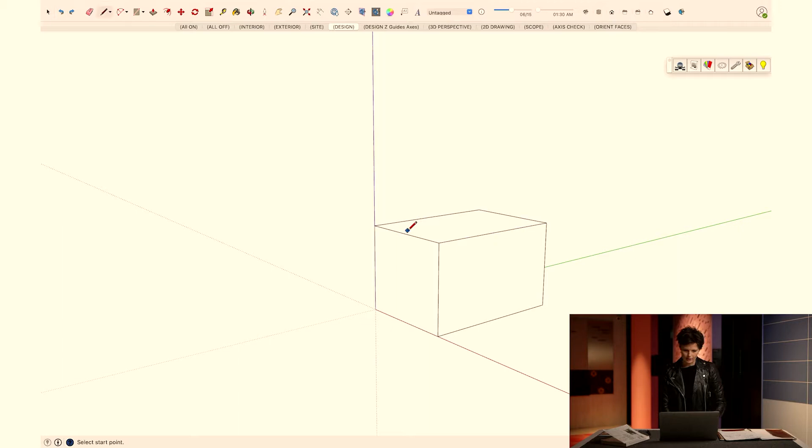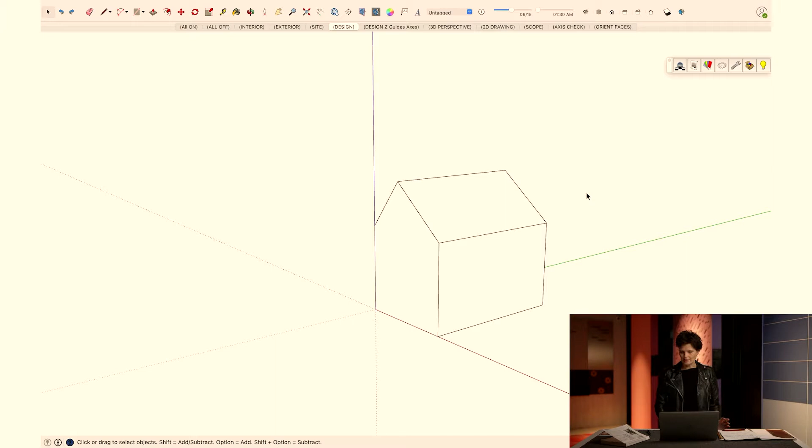It's easy to do it just like this, so you know you're drawing in the right way with the use or help of the axis. But when I want to show my design to my clients and want a clear picture, I don't want to show the axis because it's disturbing. So that's when I choose another scene with other settings, and you see the axes are gone, and you just have a nice clear view of the design.

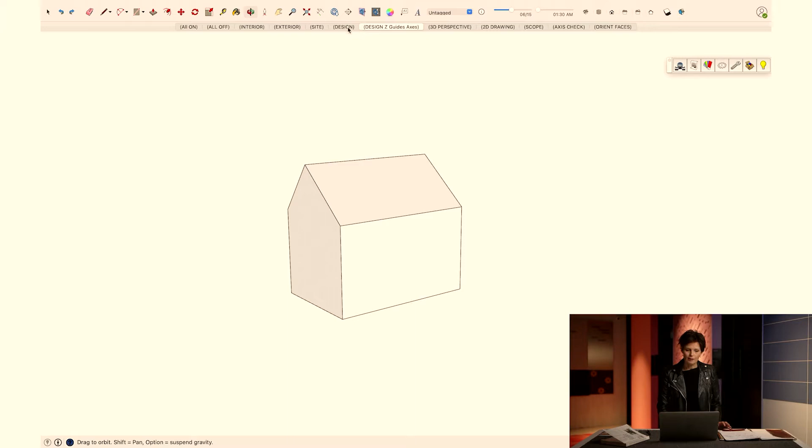But sometimes you make a little mistake and don't know where. For example, you made a cube, you think you made a cube, but somehow the line is a little bit off. It looks like straight lines, but it isn't. So when I use this scene setting, axis check, immediately you'll see the line that is not in line with the axis, the edge is colored black. This is a really nice tool, and you can simply fix it and go on with your design.

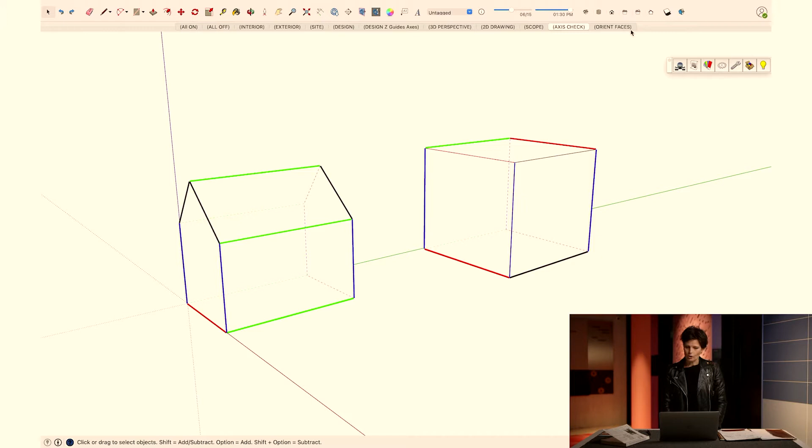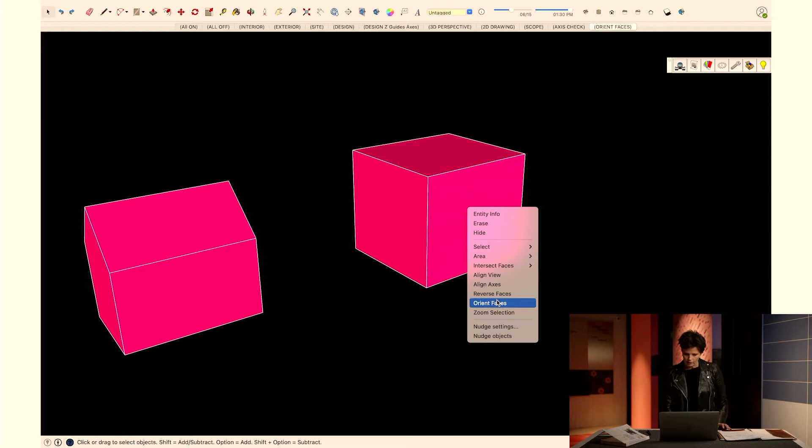Also, an important feature is orient faces. You see in this scene all the faces are colored bright pink. But when you reverse a face, I'll reverse it right now, and you'll see that the face has a different color, because this is the back side of the face instead of the front side, which is important also when you want to render.

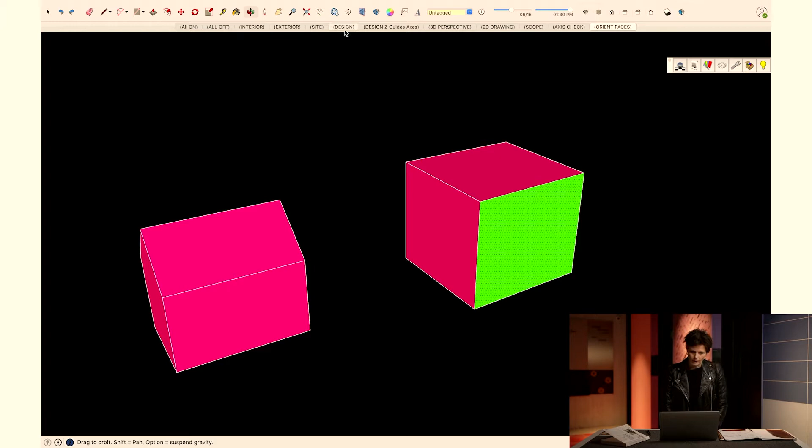So these are some tips and tricks that I use. But then, when I build my model, I'm going to save it and import it into the layout drawing program of SketchUp. I'm going to show you now.

Here I have an example of a project, a big attic floor just near Amsterdam, and it needed a total renovation. It was one open space, but the family that lived there wanted a big playground for their kids. So I designed 2 bedrooms for the children and a bathroom for the children, and downstairs was an extension for another bathroom for the parents.

But let's start, here I'll show you how I work. I use a template that I just showed you in layout, and as you see, I can give a quick sense of the layout with all the most important measures. Then I'll show you that you can also use nice colors and materials in SketchUp, and without rendering have a very nice result.

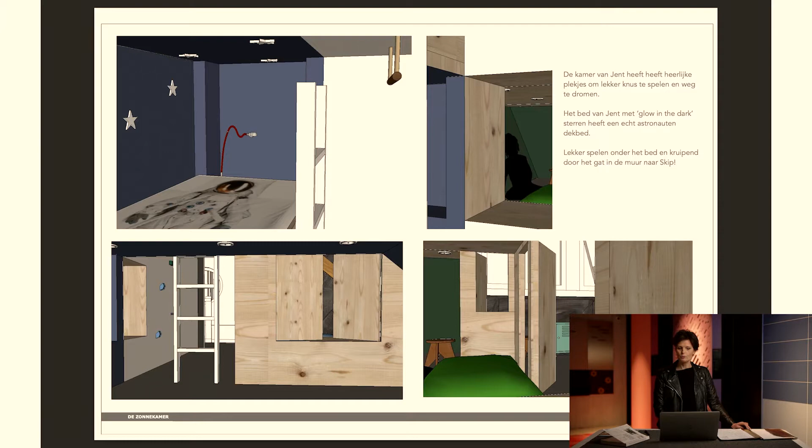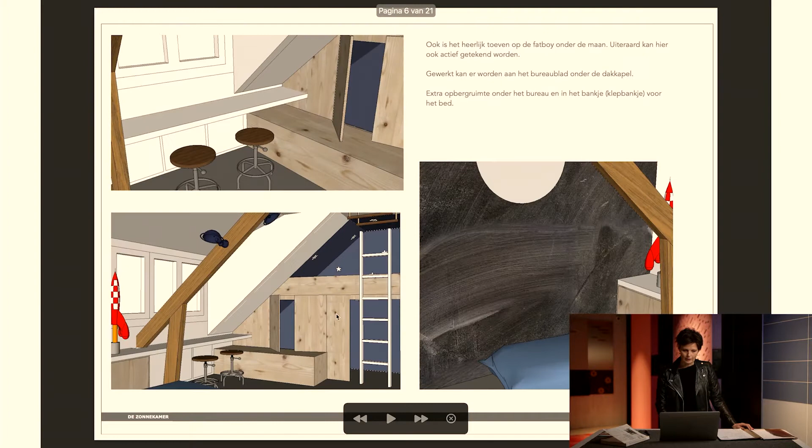As you see here, these are visualizations of the bedrooms of the children. They can just crawl through the cupboards. Here are the cupboards, it's just a separating part, they can crawl through here to each other. So these are all images with a lot of color and material, and it gives you a good sense of the atmosphere you want to reach.

So this, for example, is the room of the little one. You see, it really gives a good feel. I also want to show you the panorama view of the rooms of the boys. I made it for them because they could use the VR glasses, and they were very happy to just have a look around in the new room. I'll show it to you now.

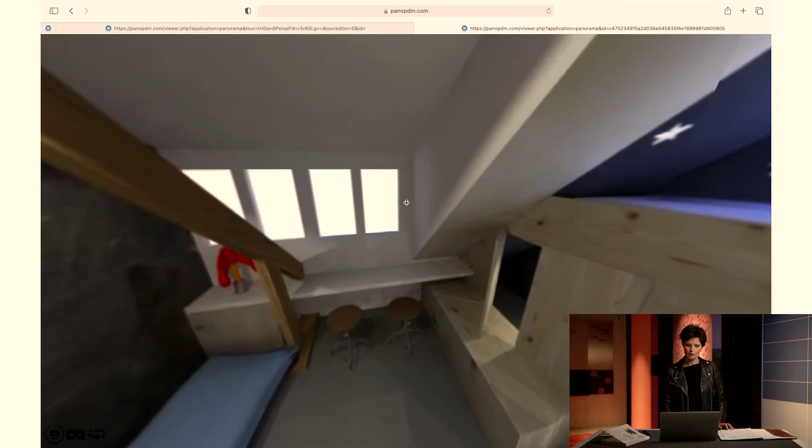So for this panorama view, I used Podium, and this, for example, is a 3D moving image of one of the rooms of the children. You can see you can also use lighting. I've drawn a climbing wall, and here is a hole to the other one, the other room of the other boy. So this is the other room.

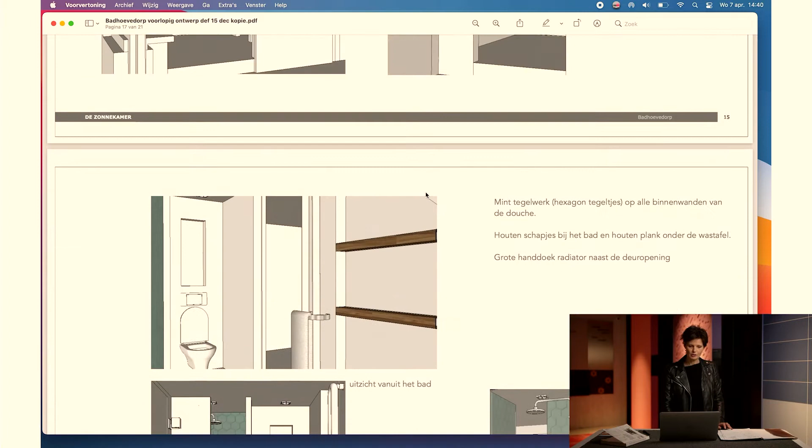So you can see it really gives a good idea of how this room will be when it's finished, with here the hole to the other one. So you see, when you use SketchUp and a presentation software for layout, you can really show all kinds of different images, mood boards, visuals, and also a movie.

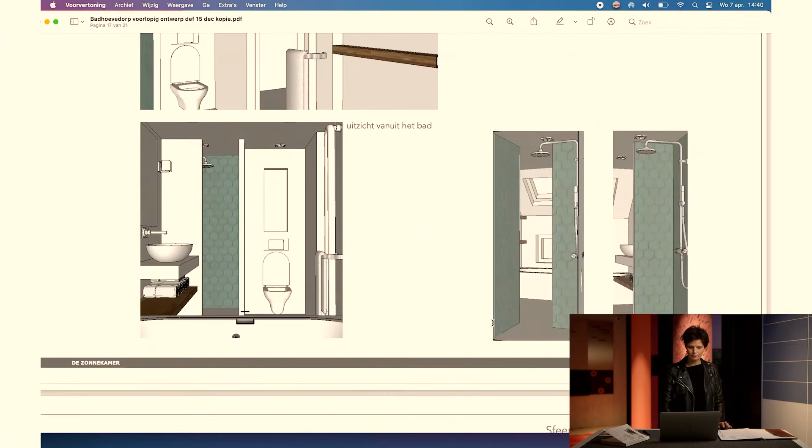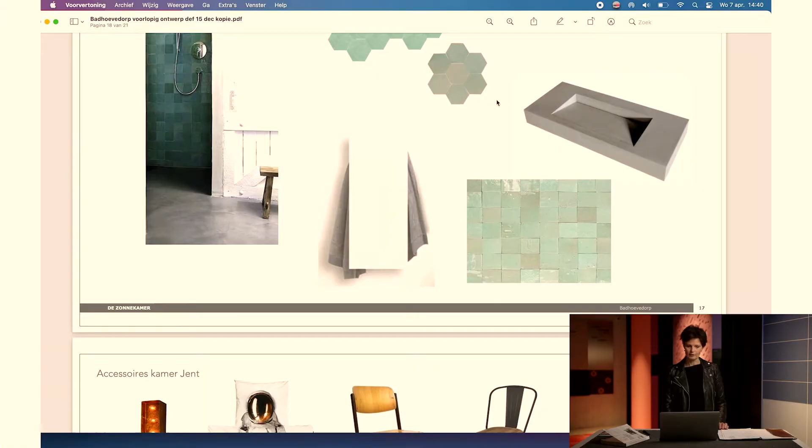So what I also do a lot is making mood boards and finding accessories and the right products for the rooms, wallpapers and so on, so that the clients can easily find and make the atmosphere that we have created. So the next project I want to show you is a concept design.

So the one I just showed you was already with a lot of colors and materials in it, and you're a bit further into the process. But of course, when you start drawing and designing, you first start with some concepts. And for this one, I will show you my layout documents.

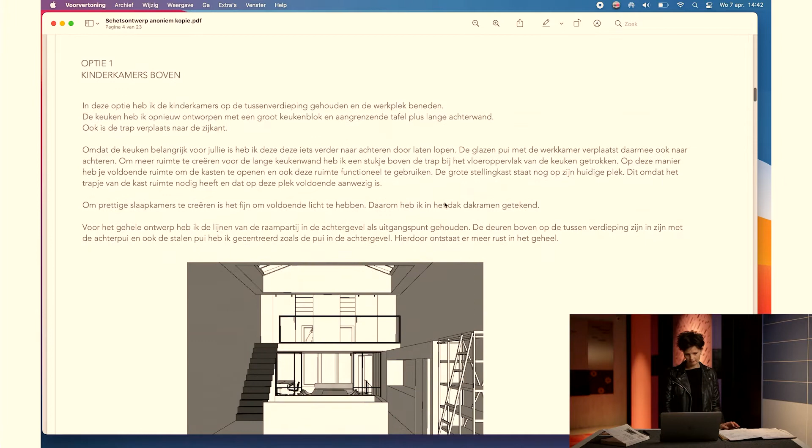So this is a canal house in Amsterdam, with a family with 2 children. In this canal house, they want a big kitchen, 2 bedrooms for the children, and a study. So I started with an open space, and as I go along here, these are the concepts.

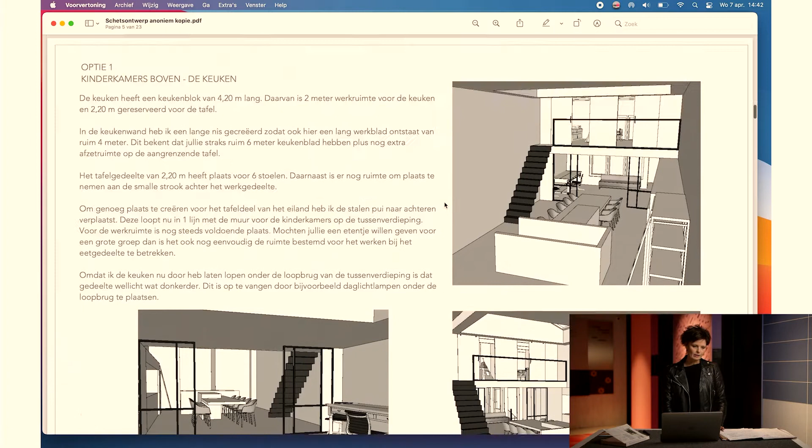This is option 1. It's all still in black and white, because it's just not as concrete yet. So of course, again, the layout with the most important measurements: a big kitchen, a study separated by the kitchen with steel and glass doors, a lot of cupboards, space, and above on the first floor is like a mezzanine with rooms for the children.

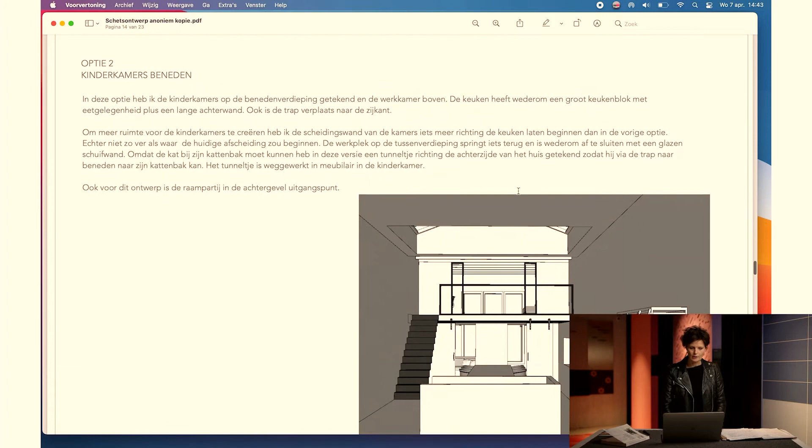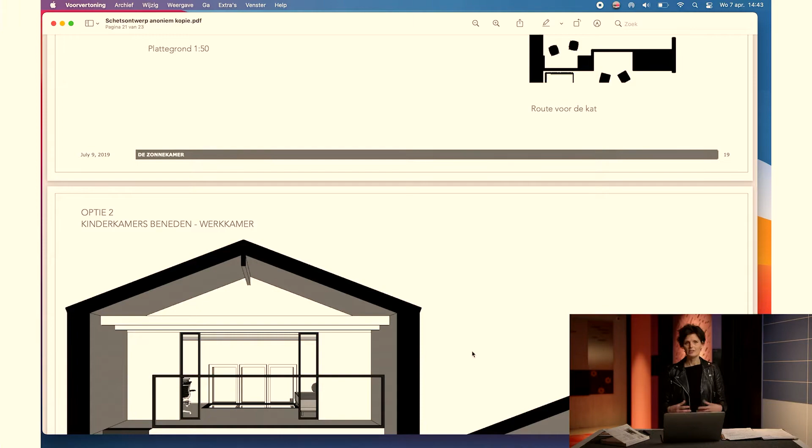The other option, we'll go to it now, is with the study upstairs, and downstairs are the children's rooms. So then I present this to the customer, and they can choose what we will do, and they choose one concept, and that's when I go and make this more detailed. So for example, these people chose a concept with the children's bedrooms downstairs and a study upstairs.

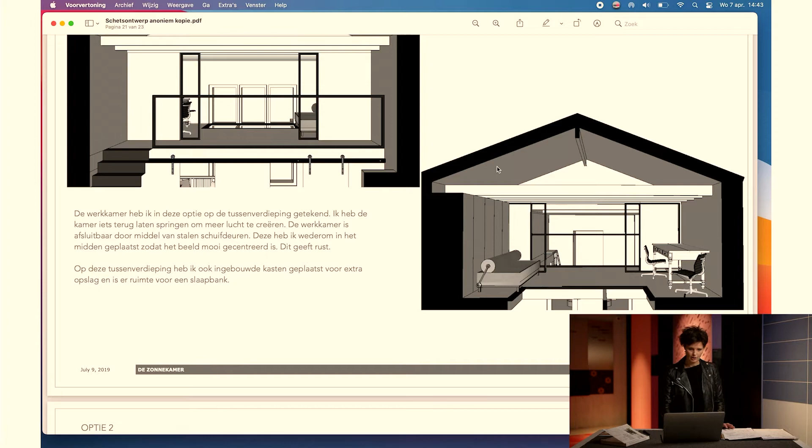So then I made new drawings, but also the contractor needs to know what I need to prepare for this build - for example, for the steel doors, the glass doors, but also where to put the air conditioning, electricity, and so on. So I want to show you that also these kinds of drawings you can easily make with LayOut.

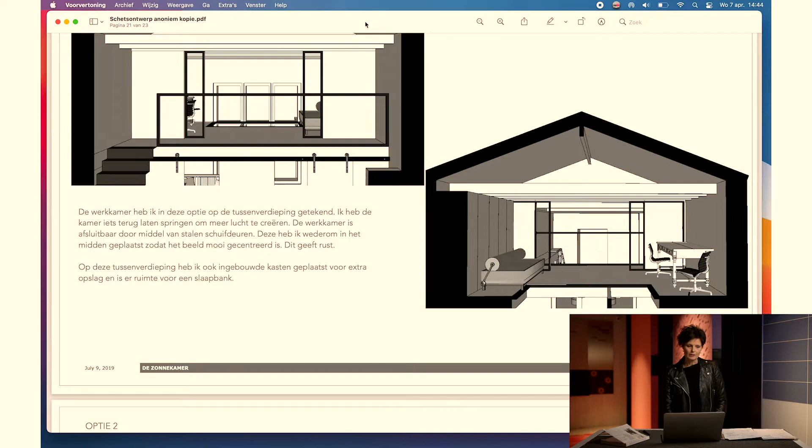And I will open this version of the drawings right now for you. So these are the drawings that I made for the contractor. And usually when you make drawings for the contractor, first they want to know what's the current situation, and then they want to know what's going to be new.

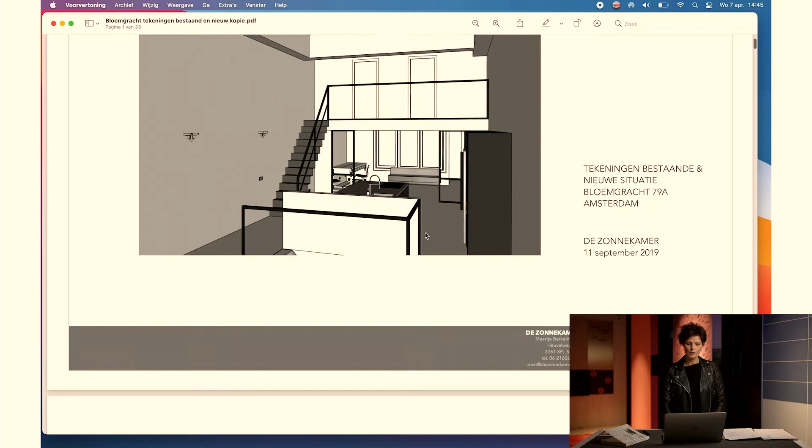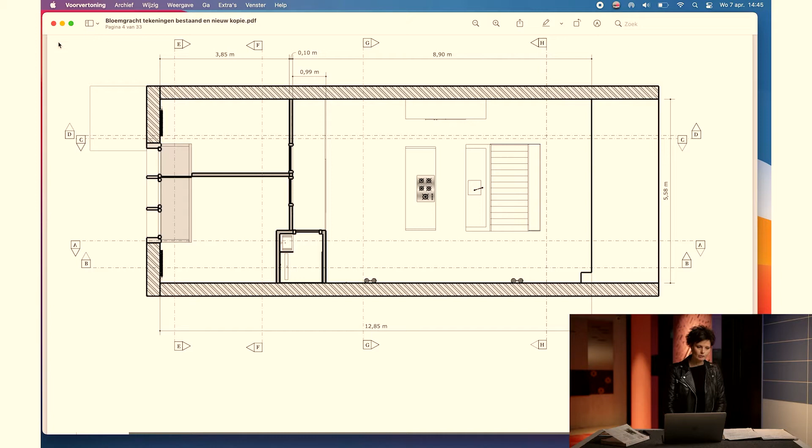So here I make the floor plan of the current situation, and you can see that it already has all the hatches in the drawing, and measurements, and also here all the cross sections that I made. So this is pretty detailed, and the contractor just gets a good image of the situation right now.

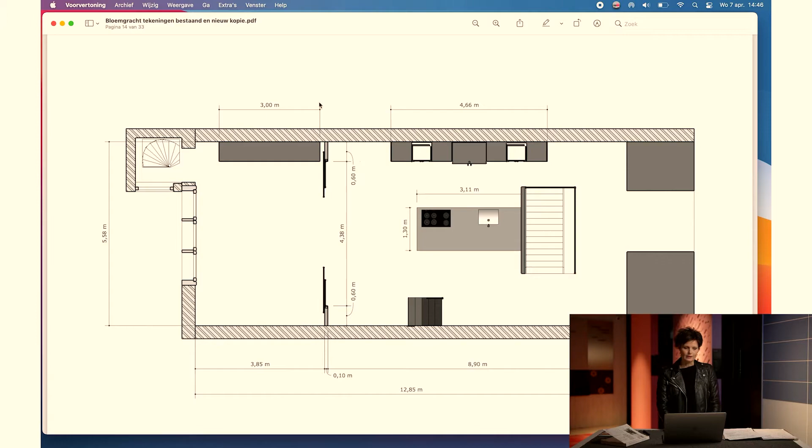Then, of course, I will show the drawings of the new situation. This is the new design, again all with hatches and cross sections.

Also the place where the lighting will be, all the lighting fixtures, where the beams are, and for example here where the light fixtures will be, but also the air conditioning, placed here above. So the contractor sees exactly what he needs to buy, how much he needs to buy of this, how much material he needs.

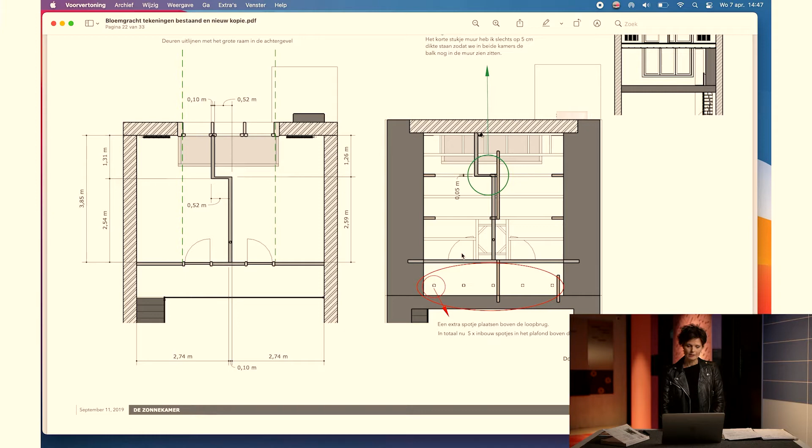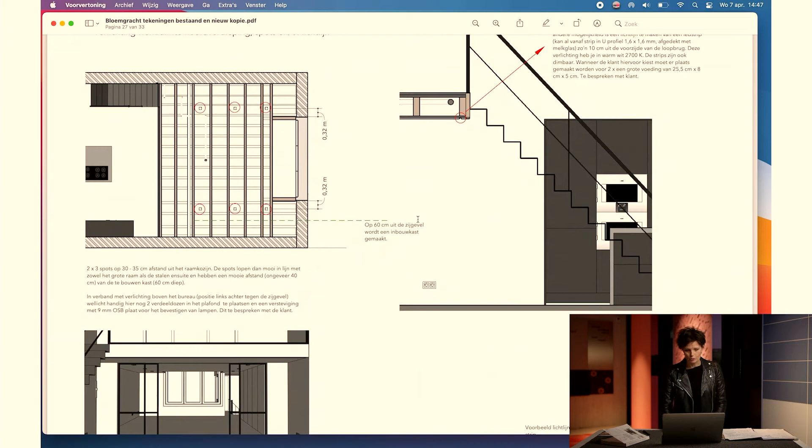So all the most important details and placements are visible with these drawings. Also here, for example, the water drain of the air conditioning, all the beams, where the light fixtures and spots will be, and so on, and the skylights too. So all these technical specs you can also visualize very well with the layout SketchUp software.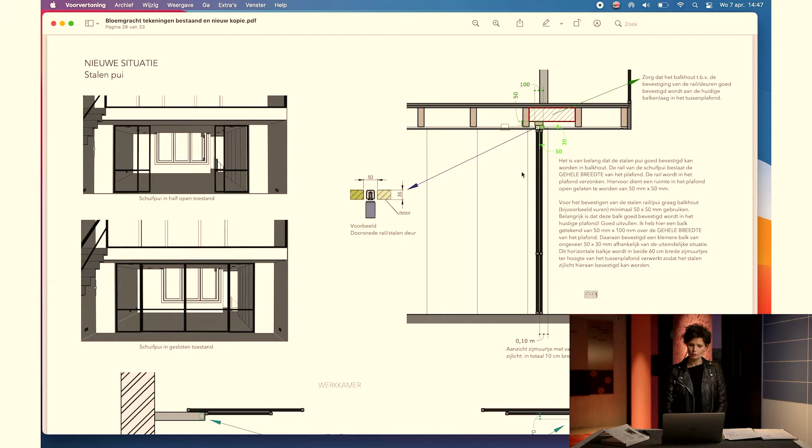For example, here, what do I need to prepare to install a steel sliding door, or to install a steel door with a rail where the door will run on. So it's really good software to use.

Another project I'm working on right now is people who are going to move. They bought a new house and they want a really big kitchen because they're real foodies. And they have this huge wine cabinet which needs to be in the kitchen.

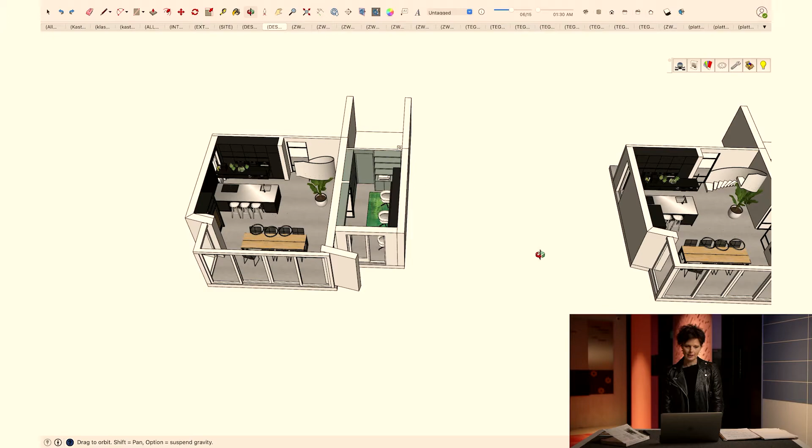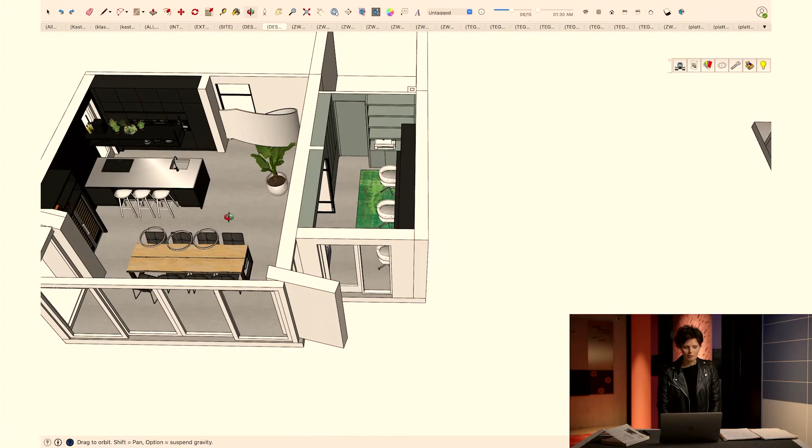And also they want this study next to the kitchen. When they asked me to design the kitchen, they told me they don't think the wine cabinet can be in the kitchen, let's place it in the study. But I'm not sure if they will be working very hard with this wine cabinet in the study. Anyway, I told them I think we can also just place this cabinet in the kitchen.

So I made a design, and I also made a little movie to show them how it will feel in the kitchen when the design is finished. I made it in Podium, so they will have a feel of how it will be in the new kitchen and study. So this is one design I did.

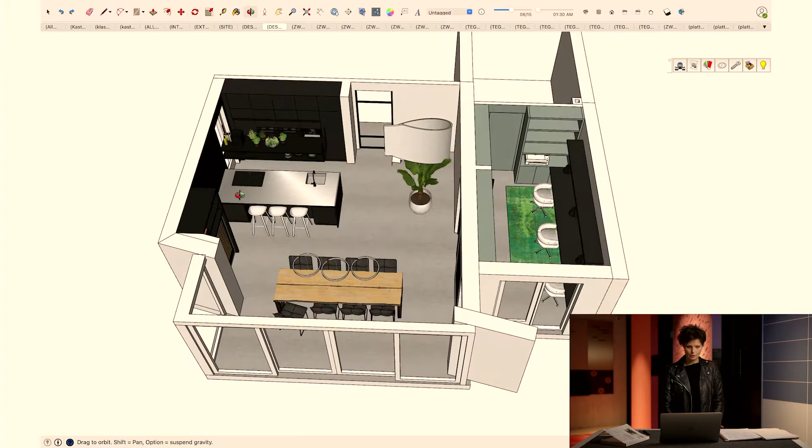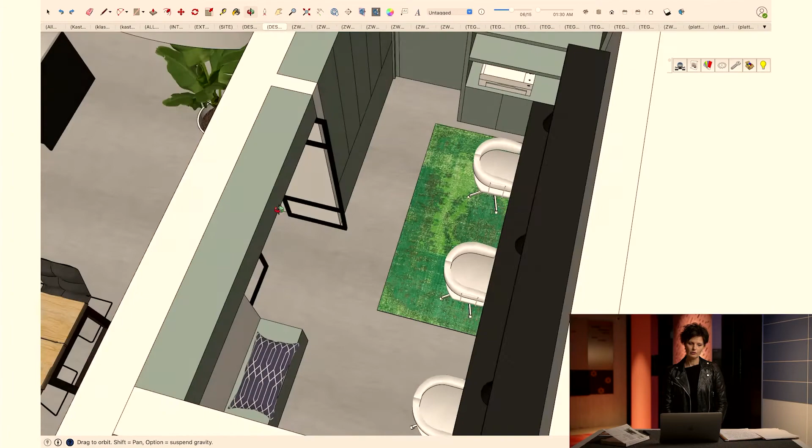All black accent wall and a study with all built-in cabinets and some steel doors. The other one I made is this one with tiles as an accent wall, green, and a different design for the study.

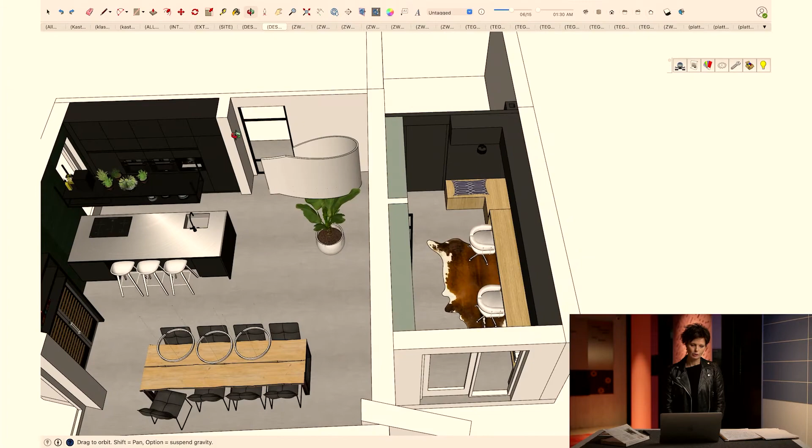So this is also what I do a lot. We will go around into the model, just turning it and orbiting, and then I can also show the client what is happening in the model, and sometimes make some changes while I'm at it and showing the design. So this is the panorama viewer from Podium, and here all the panoramas are collected, and you can just click on it and view them.

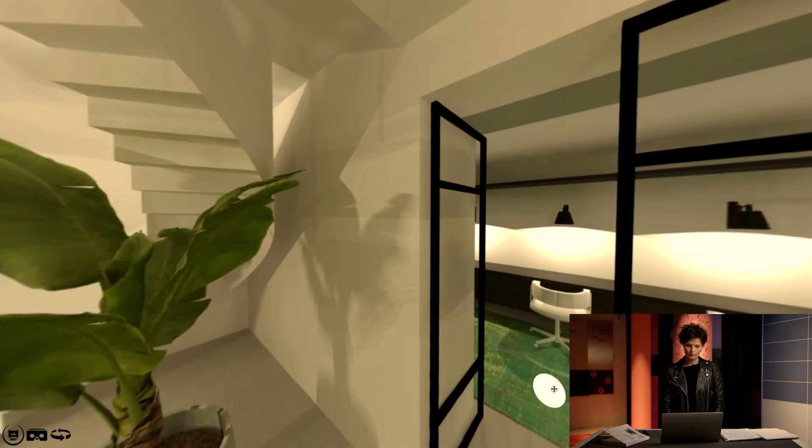So I made this little tour. You can just turn around. All the lighting is already in there. Then you can just click and go to another space. This is the study.

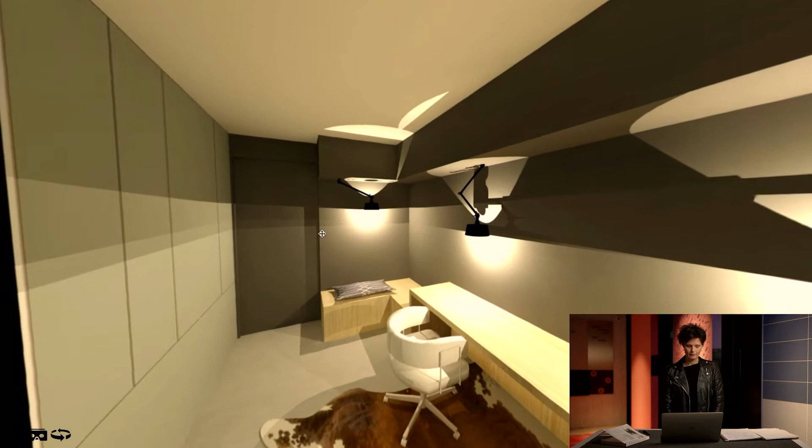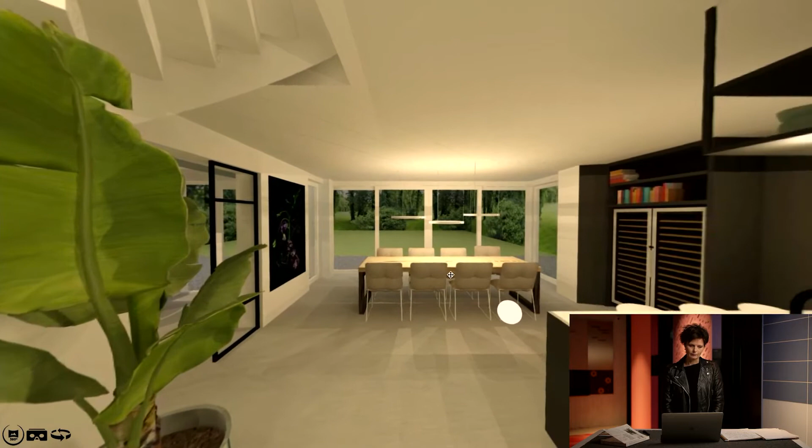So this is also very nice for the customers, and so they have a little tour of their new home. So all this is possible with Podium.

Another project I would like to show you is exterior as well as interior. This is a little farmhouse, and the owners wanted to connect it with a shed, which is over here. For this project I made an extension of the house like this.

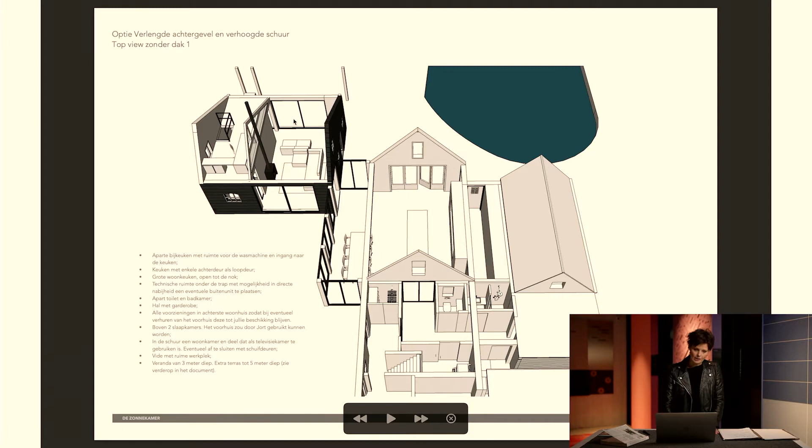So now it's possible to make a really big kitchen. Before, this was the living area and there was a small kitchen over here. But for the new design, it's a really big kitchen, with the connection with all the glass and steel windows to the shed. In this shed is now a living room and also a small study. Here you see that SketchUp is also easy to use for these kinds of drawings.

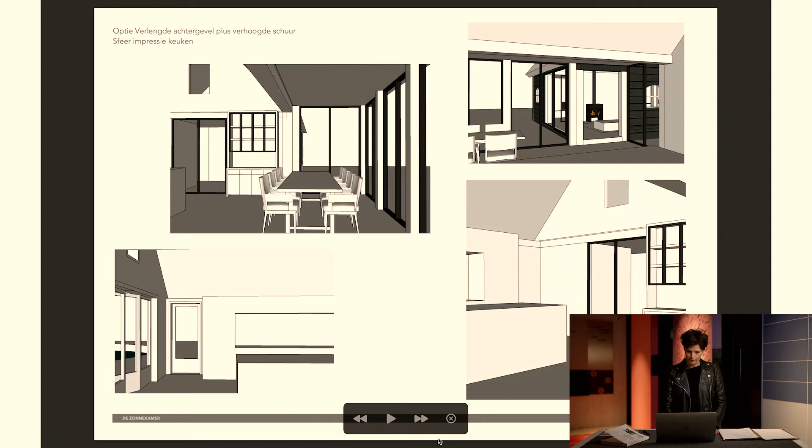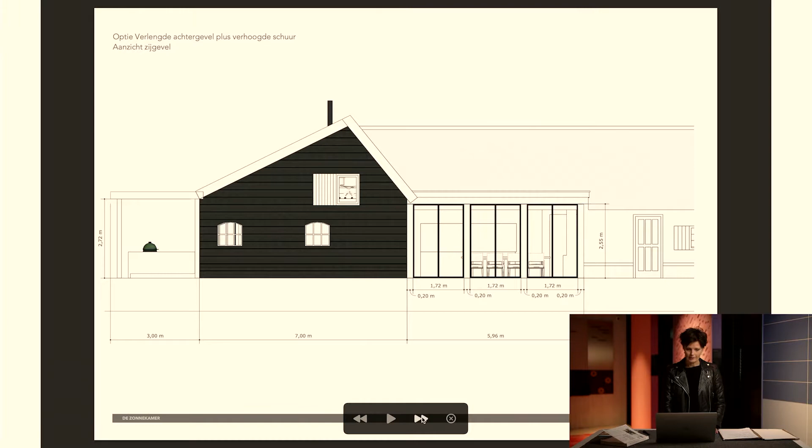Here are some views, like visuals that I put into my presentation. What is also nice is that when you are doing a project like this for interior and exterior, you want to show how these buildings are connected. Often it is also with a garden and all lines and designs of what happens just outside the building.

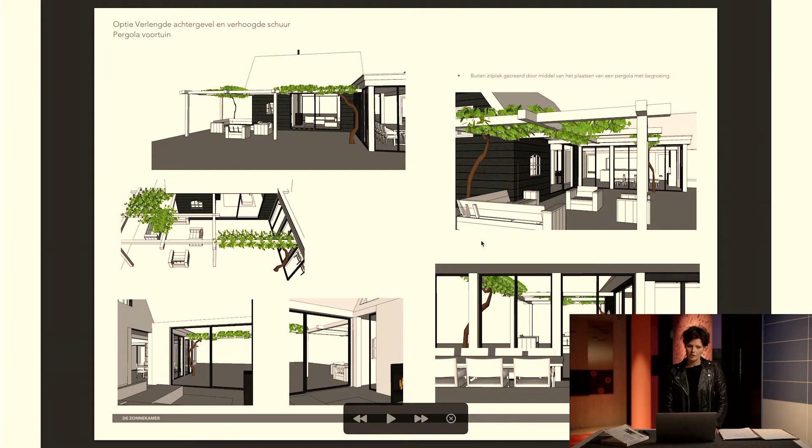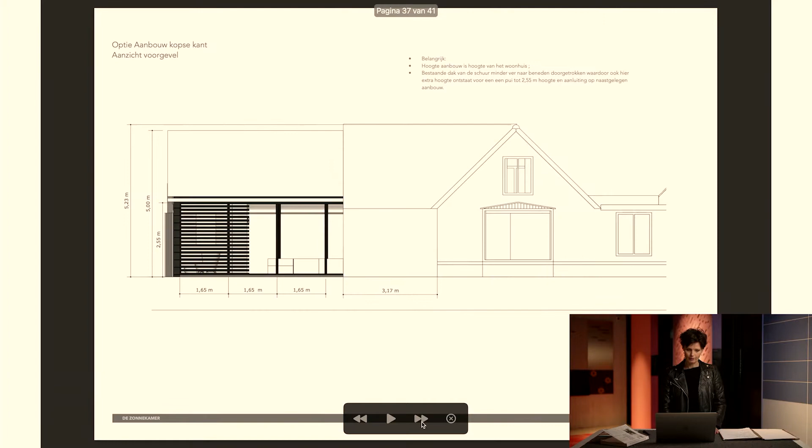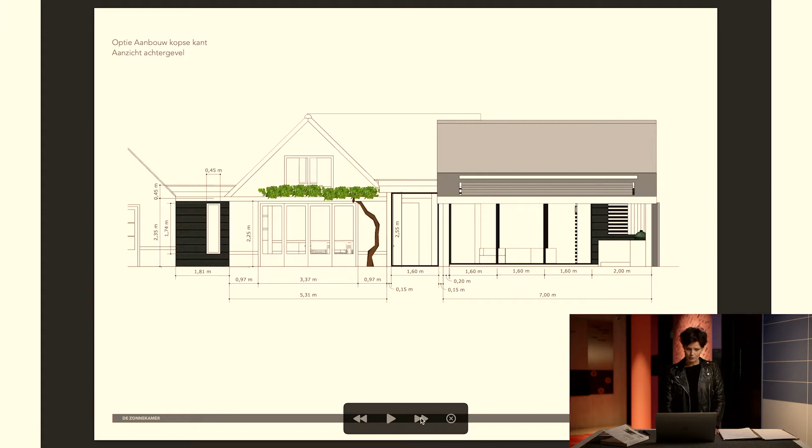Here, for example, a layout with all the most important measurements. So when the contractor sees this and they say we want to go with this option or the other option, then they can also see, oh, we have to order this, we have to order that, all these kinds of materials, so it's easier to make a price. So you see that you can also visualize a garden and connection of inside, outside materials. It's all possible with SketchUp.

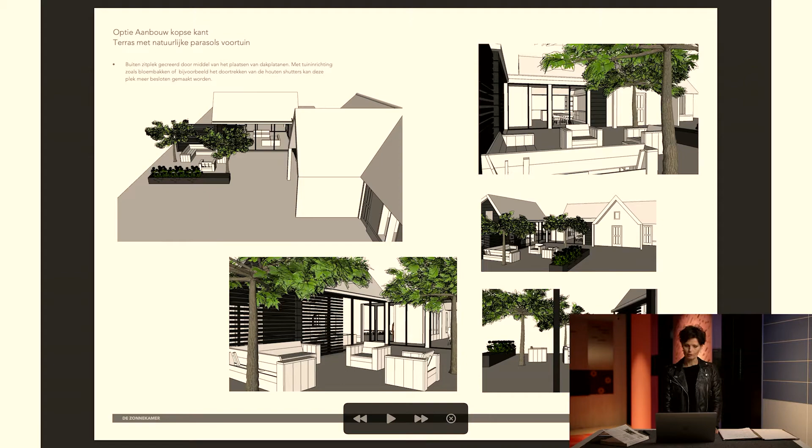Hi, my name is Maartje. Pretty impressed, you're a pretty productive lady. Well, lots of projects. The first thing that pops into my mind is how much time does it cost to do these projects?

Well, it takes a lot of time, of course, to make such a nice product in the end, with for example the bookwork that I always do. You're also printing it out? Yeah, I'm printing it out in a layout format, then you get a nice presentation document.

Yeah, okay. And you mentioned working with templates in your presentation. Can you tell a bit more about how do you arrange the lighting in these templates and how do you create a template? The way I created the template is with the help of Brightman, a book which I use to organize my model in an efficient way.

Question from the audience: what is the name of the book again? The writer is Michael Brightman, and I think it's called SketchUp Workflow. He's an American architect, and he has really put his mind to making this SketchUp model work in quite a lot of different useful ways, not just drawing, but also creating some kinds of tools within the SketchUp software. And templates, how do you create those?

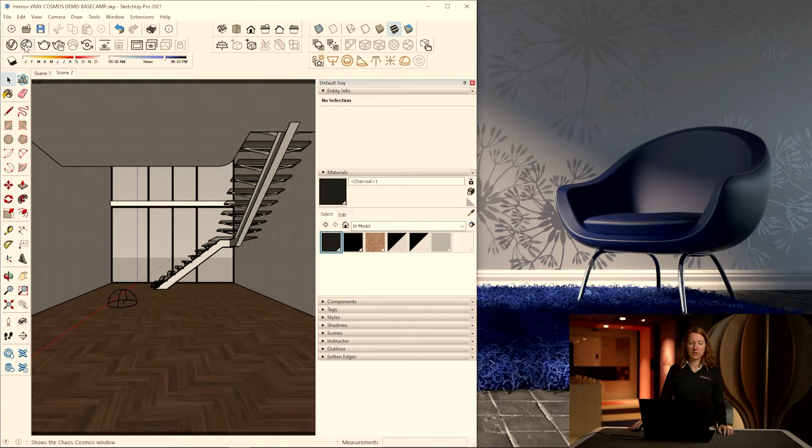Right off the bat, we can see all kinds of stuff we can download. We can download furniture, accessories, vegetation, lighting, vehicles, and people.

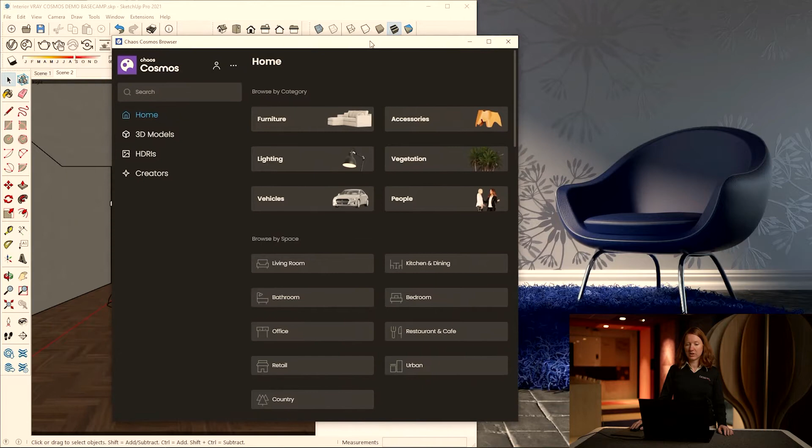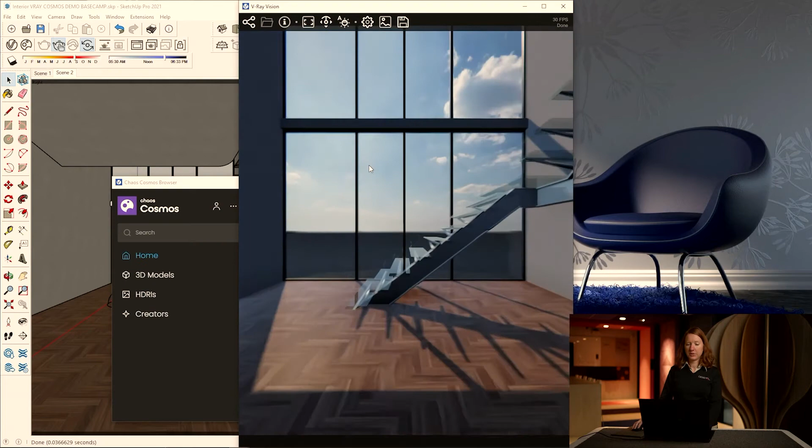In order to see what it's actually doing, I'm going to fire up V-Ray Vision as well. V-Ray Vision is specifically introduced for V-Ray for SketchUp, and it's a real-time rendering engine — actually a gaming engine. You can walk around in it using your gaming controls: pressing W to walk forward, S to walk backwards, A and D to the side, E and Q to go up and down. As soon as I click back into SketchUp, it's going to resynchronize my camera.

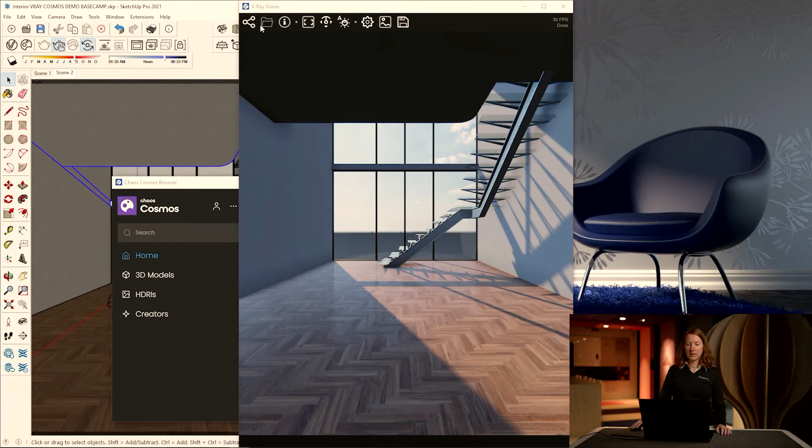Unless, of course, I don't want it synchronized, then I can choose to unlink my camera. Right, so we're going to download some assets, and we've got an empty room, and we're going to add some furniture.

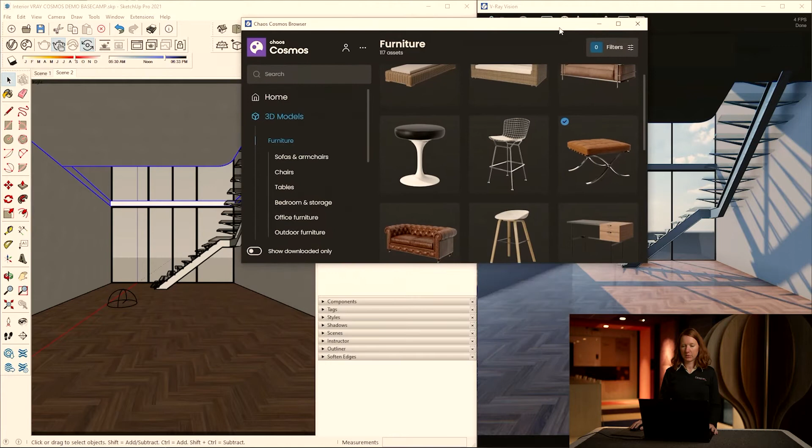It's going to be a living room, so I'm going to download a couch. You can see that in SketchUp it downloads a low detailed object, while at the same time in the render we have a high detailed object. Now let's pick the chair that comes with it.

I want a pretty rug, and I want a coffee table. Everyone gets to have some coffee or tea, you could drink tea from this mug as well. Let's put a magazine on the table as well.

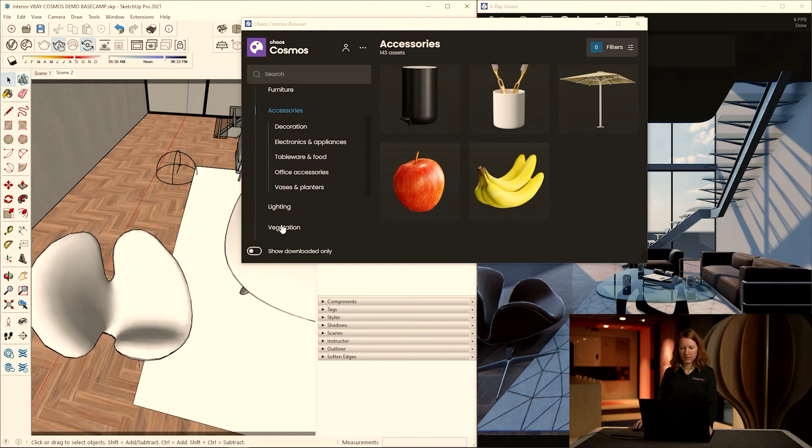That's fun. Let's put some plants as well. So we're going to go to vegetation and pick the subcategory indoor plants, and let's put this indoor plant right in the corner over there, and let's take this one as well.

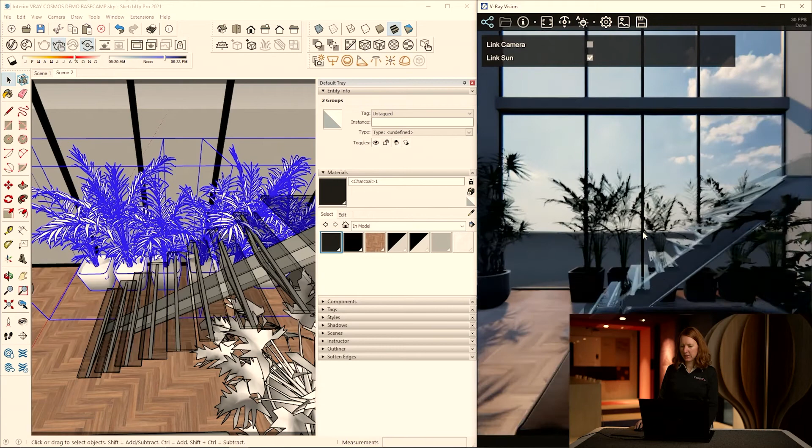In our render, it's maybe not very obvious, but these plants are pretty low quality still in our render. We can up the quality by checking on that we want to use high quality Cosmos assets. So we check that on, and in order to actually see the effect of that, we have to restart Vision.

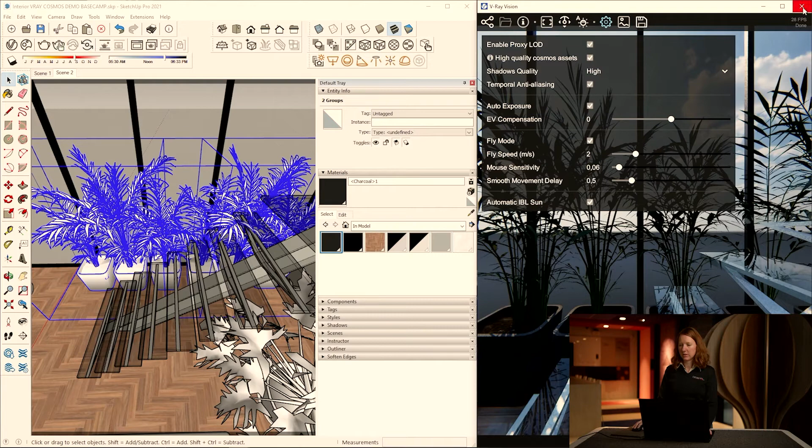So let me close that down for a second and restart. And now we've got the highly detailed version. You can see the leaves are much prettier now.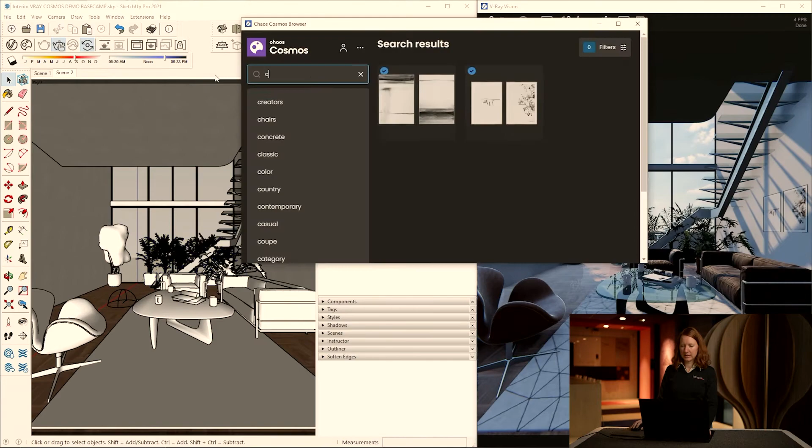So we have our little tropical rainforest. Let's add some more details, let's add some art on the wall.

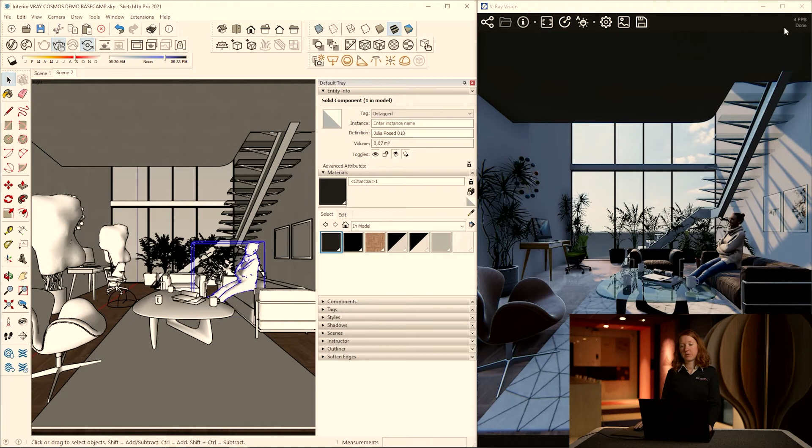Of course, I have used all this time my V-Ray Vision rendering preview, which is useful, but it's not very pretty. It doesn't offer me the high quality experience that we are used from V-Ray itself. So I'm gonna switch off V-Ray Vision, and I'm just gonna fire up an interactive render.

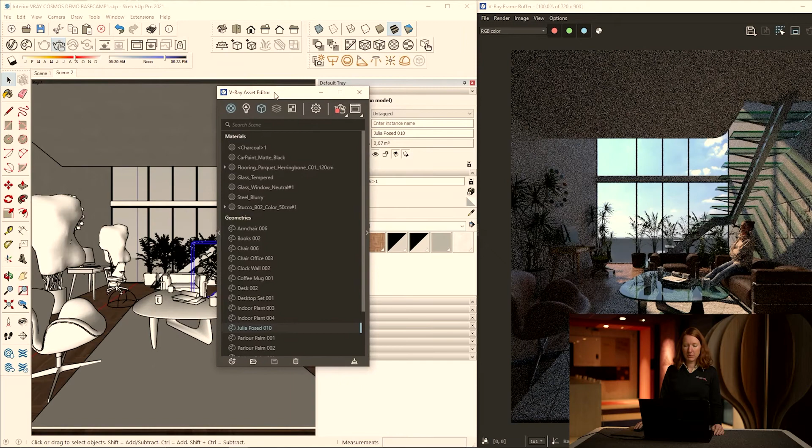Right now we have the middle area, which is quite nicely lit, but the left area is very dark. Maybe we should add some lamps as well. Lighting, wall lights.

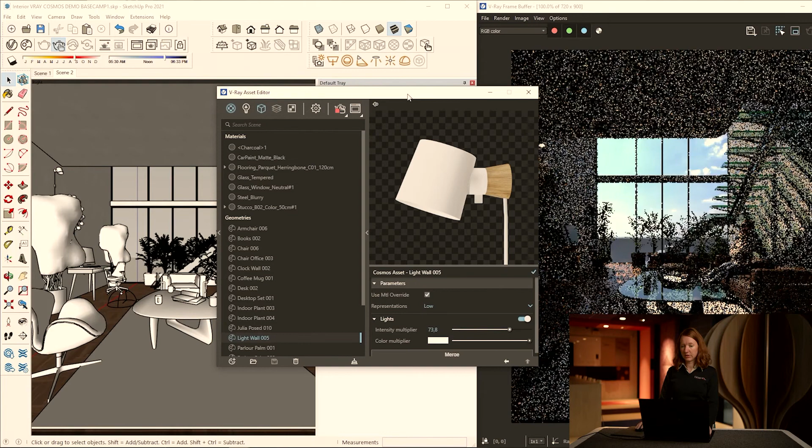And I want to make them brighter, so I'm going to up the intensity for this light source quite a bit. And if you reach the end of the slider, you can always just type if you want more.

And then of course I can change my camera settings. You can use the very simple exposure value. Now if you want to tweak it, use your arrow keys, because if you slide it with the mouse, you're going to overshoot your target.

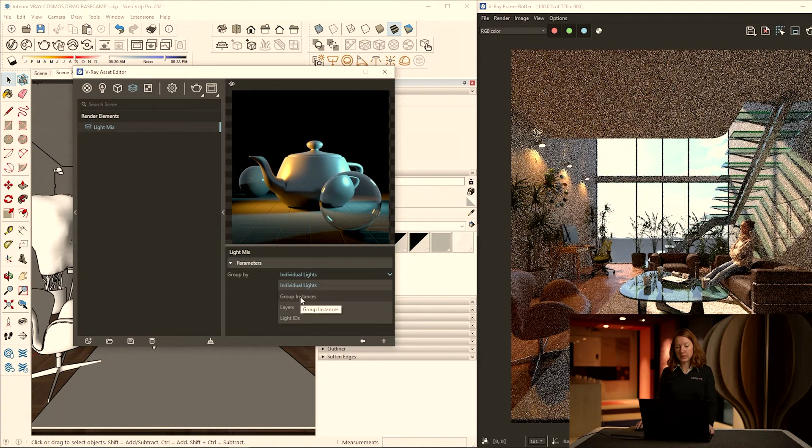I'm happy with that, and I'm going to stop my interactive render. And for final rendering, I really like to add a light mix render element, which allows you to tweak your lighting after your render is done.

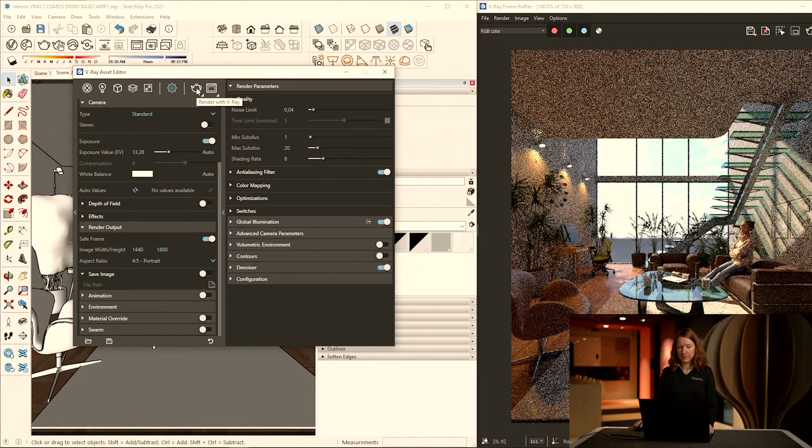And maybe the resolution could be a bit higher as well, let's put that to 1440 by 1800, and render out. And of course, that's gonna take a while, so let's fast forward that for you guys.

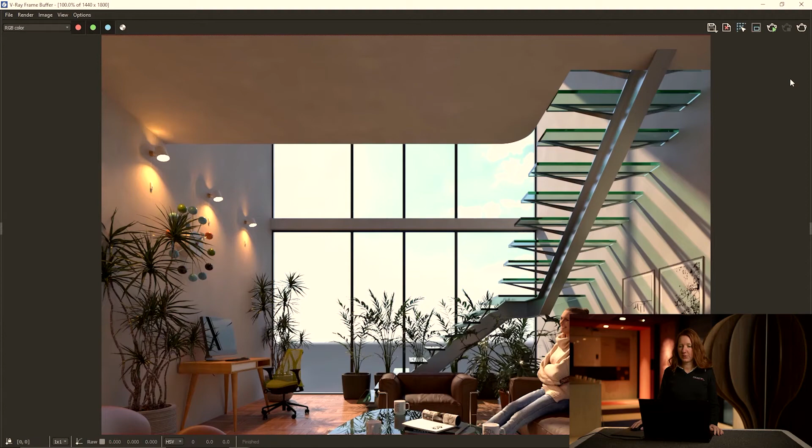Our render is ready, and you can see we've got a beauty. Now let me tell you just a few little more things that we can do with this render now that it is ready.

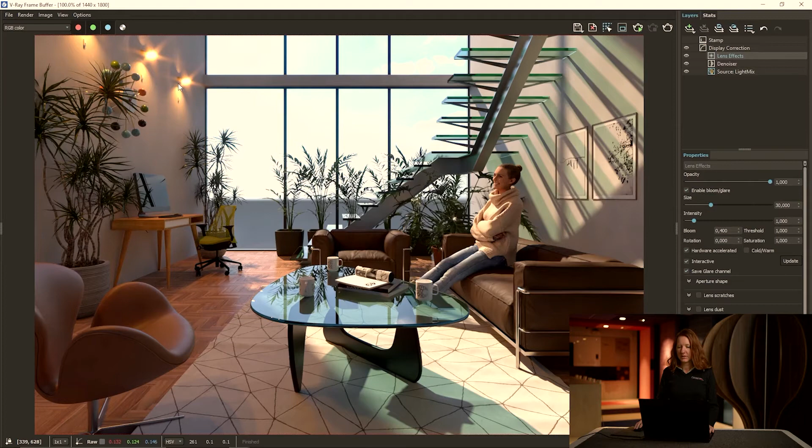At the right side of our screen, we can double click to expand our layers, and we are getting a Photoshop-like layer structure where we can enable some stuff such as lens effects, where you can see that it works very well with the lamps on the wall.

And last but not least, we have the light mix. The light mix enables us to switch off and on, and even change the intensity of lights even after our render is done.

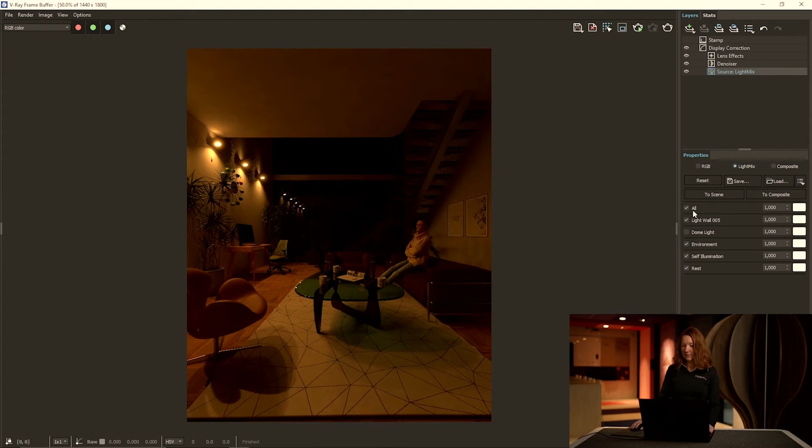So let's disable the dome light, and ta-da, we have a night scene, just like that. Or maybe we do want a dome light, but less intense, and we can do that. Maybe the lights on the wall are a bit too bright, so we can dim them a little bit.

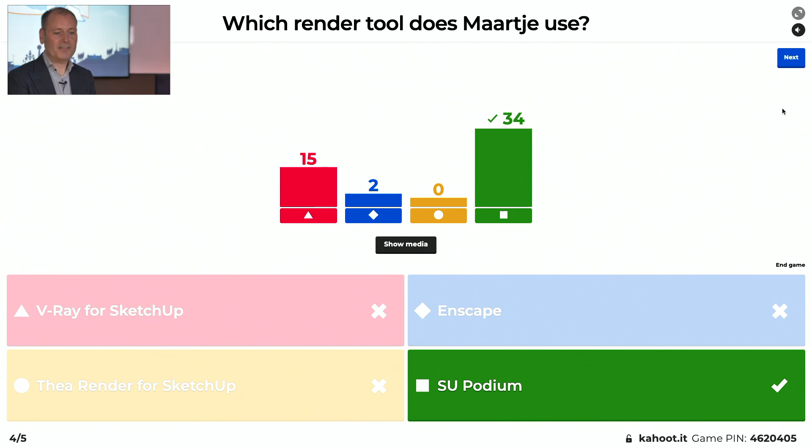And I think it's the last question—no, the 4th question. Which render tool does Maartje use? So does she use V-Ray? Is it Thea? Is it Enscape or Podium? Three, 2, 1, and it is Podium, of course, and the majority had it right. A little bit distracted, some chose V-Ray, but it's Podium.

Okay, now the last question. Before we go to that, Marielle and Maarten are in a close call. Well, it's a close call between Marielle and Maarten, so let's go to the final question and see the final result.

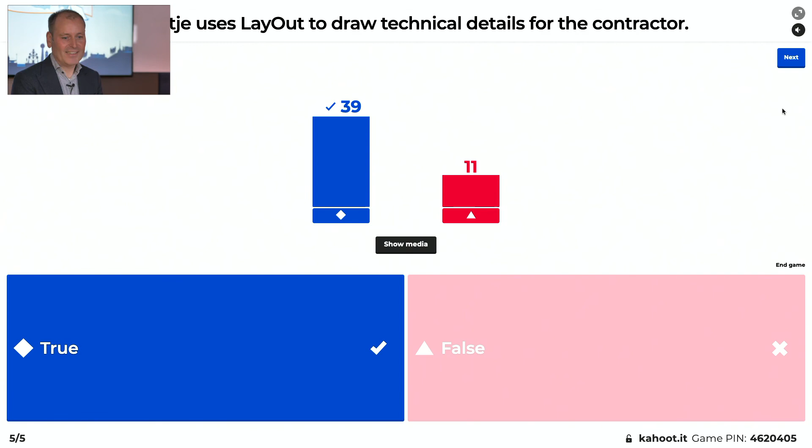Okay, so this is a true or false one, it's very quick. Does Maartje use LayOut to draw technical details for the contractor? Or does she use something else, or by hand, or doesn't she do it at all? Is it true or false? It's a good question, right? Be quick, be quick. Okay, it was true, so the majority has it right.

So let's see who the winner is of the first Kahoot session.